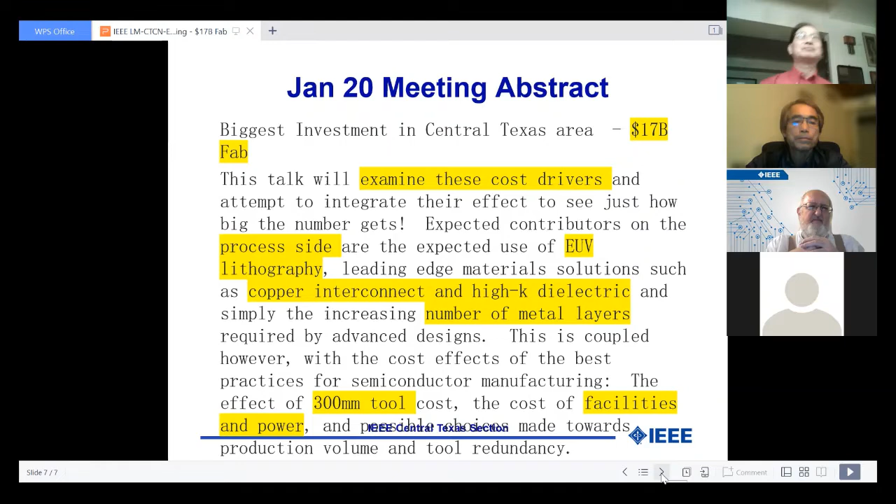I don't know. So I'm out of that business for a long time. I retired in 2001. I used to be a product engineer. So I know some of those terms, but I really don't understand the actual workings of those fab areas. So I'm really glad that Dr. Larson will talk about this. So Dr. Larson, the floor is yours.

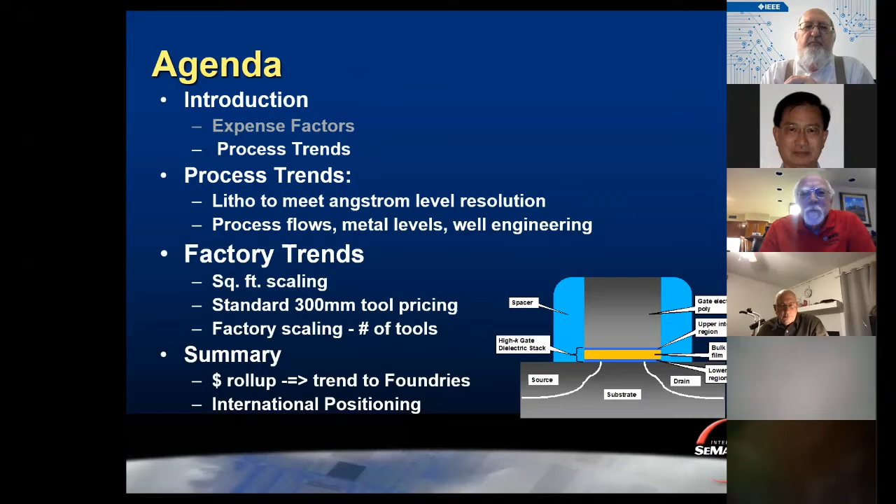Let me go on to what I have to talk about. What I'd like to start with is simply some of the process trends over time. I will then follow, I noticed I used process trends again, but this is much more towards equipment rather than the global device thing. And then we'll move on to the factories that follow that. I use this in my classes, and it's just too concise to not include.

And this is scaling. Why do we scale? Well, it's actually pretty simple. If you take up here and say that I'm going to scale the channel length by a factor S. So if S increases, the channel length goes down.

You then, in pure scaling, would also scale the channel width. So all the dimensions shrink at the same time. To do that, gate oxide should also shrink, and the substrate doping, to keep pace, needs to go by S squared. Notice that's a multiplication. That's actually one of the issues with shrinking devices: the substrate doping needs to go up pretty much past where it's really capable.

But if you do that, the drain current goes up by that factor of S. So you shrink the device smaller, the drain current goes up by that same factor. And this is simply using the transistor drive equation. If you look at the input capacitance, that also shrinks by the factor S, which means then that the maximum switching frequency, which is proportional to the drain current divided by the capacitance, actually goes up by S squared. So this is where you get that gigantic increase in speed via size shrinking.

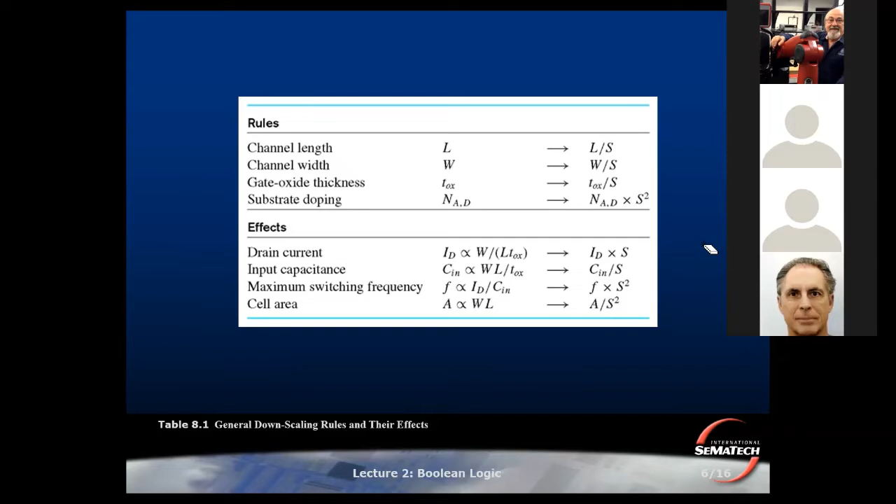Now, at the same time, the cell area that you would put the transistor in, since that was part of the shrink, goes down by S squared. So you get more devices operating faster with more power, all by that one simple thing. Sounds like you want it. Got to have that sort of thing. And of course, you all know from history that is what we've done.

So I saw you had talks about beyond Moore's law coming. Great. I'll just say, from one of the champions of Moore's law over the decades, we're still following it. This is actually a really old slide, at least 10 years old. And the basic scaling of devices has extended and has slowed a little bit. We're talking about 5 nanometer in 15.

And let me change you guys so I can see.

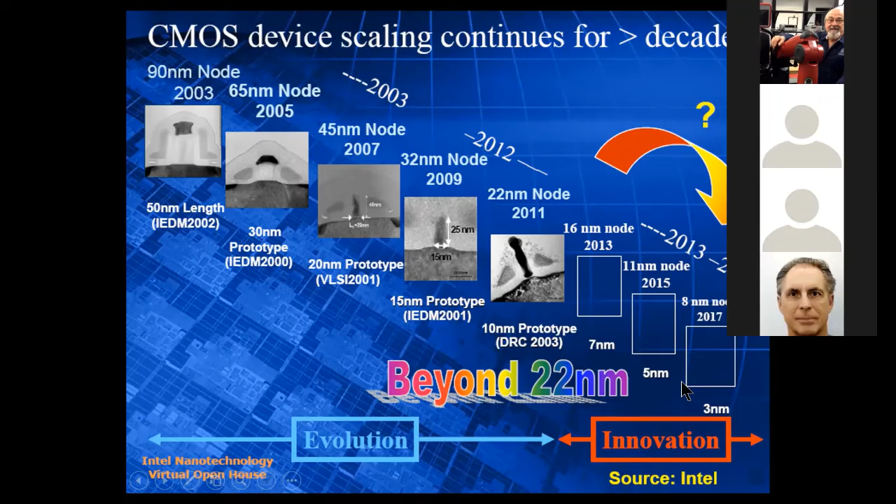Yeah, we thought we'd get to 3 nanometer just past 2017. So we're only a little behind it. That's all working, but we don't really know how to get too much farther. At the same time, where I poke at the skeptics out there is that for my entire career, CMOS scaling has won. You get higher performance, you get lower cost per function, and there's some bright young engineer out there that finds a way to do it.

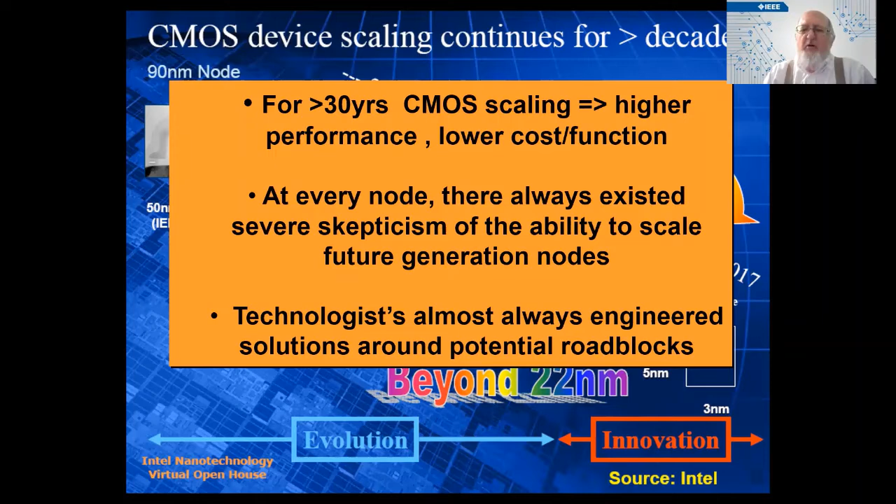So we're making devices that are 10 atoms across now as the gate length. It always causes you to pause, but we've always gone around those particular roadblocks. Now, where I played a lot is new materials and architectures. In building devices, we went from a really commonplace planar silicon device, and we moved on towards improved electrostatics in the Tri-Gate FET.

Since we're talking Samsung, I think it's really appropriate to note that this is a hardcore structure of the most advanced devices that they do, and relatively workable to build into designs. About the only thing I know of that's particularly troublesome is that when you have a FET, your gate width is set. This size right here, the gate, is 1 block. So the only way you get more drive current is lining up a bunch of FETs. But these things are so small and so powerful that it works.

Moving forward, gate all around is really interesting possible stuff. Perhaps the talk coming will go into that. And there were even demonstrations back about 2010 or so of carbon nanotubes as gate structure. So I'm mostly pointing and saying there are ways to evolve devices and go with it.

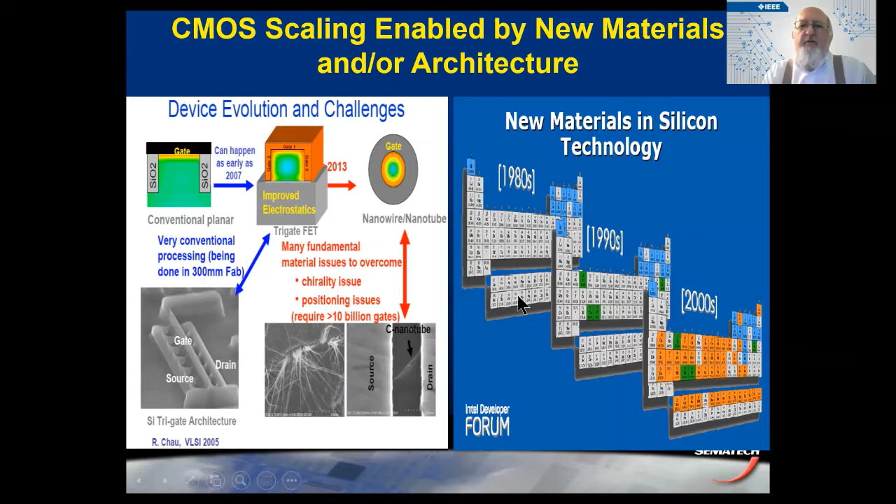Okay. So looking at the scaling that's gone on, and again, this is an old chart, those new materials and structures have extended and fit very well for us with the construction of super thin gate length. In fact, I saw a nice picture in the lecture I use for my semiconductor manufacturing class that had an early view of a 3 nanometer gate that looks much cleaner and beautiful. At the same time, high performance MOSFETs with interesting channel contributions, and of course moving to the FinFETs and the TriFET.

So all of these are good options and things that happen, but I'm putting it out there just to give you a vision of what's happened to the factory. So I think this is the last of those. Hey guys, look at all the stuff that's out there and coming. But this was our operating charter at the front end processes at Sematech.

And so the majority of the group worked on high K and metal gate. And that was the primary target that we were doing in the first decade of the 2000s. We found a very useful sort of thing. My development group was aimed more at implant and thermal technology, where we were doing whatever we could to get very, very shallow junctions here for the higher performance. We work with other people to do high mobility materials that would fit on that.

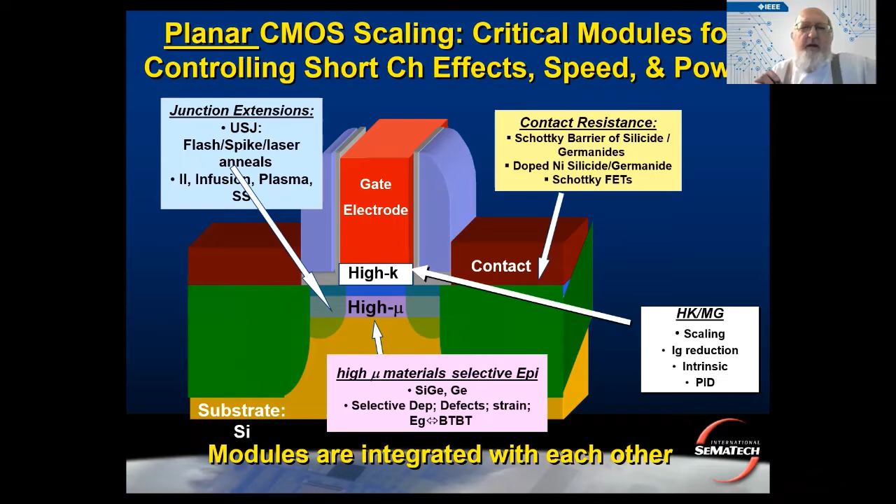All of those extend standard planar CMOS. And we also had a group that in the 2000s built FinFETs and went for that. So that's a good target of what's coming. Now, in addition, and this will lean towards the factory, although I'm not going to build it in strongly, is simply that all of the product lines out there are separated in the processes that they use and the design targets that they aim for into 3 generic areas. And we looked at that using the semiconductor drive current.

Of course, we have shrinking, but then we can also work on mobility and capacitance. And well, in Sematech, we could do nothing about the chosen gate voltage, but let that be. But what I'm talking about is the manufacturers would have a design area looking for high performance. High performance maximizes the current. Who cares what everything else is? Things that we developed for that was increasing the capacitance by having high K and metal gate and lowering the VT with having low band edge work function metal electrodes that go with it. And of course, enabling gate scaling.

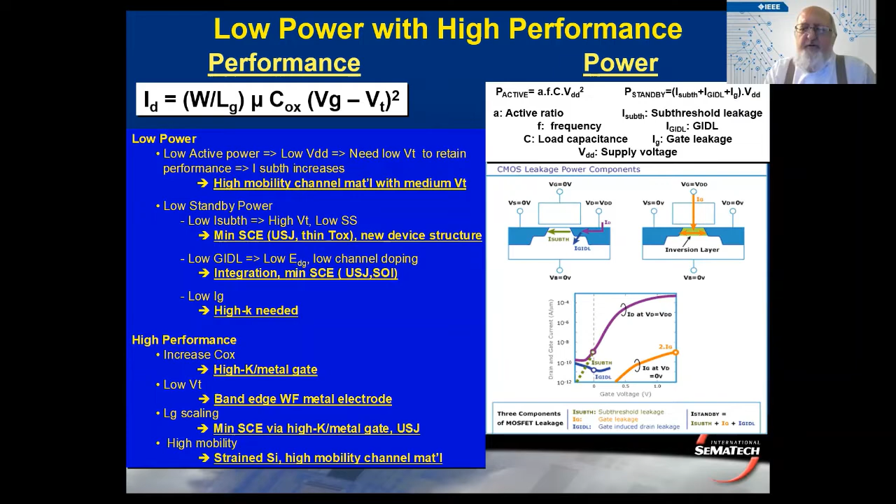And of course, I can't go very far since we are talking about Samsung and all of that without noting that FinFET technology has hit, grabbed, and worked. And in particular for memory devices, this excellent design. Why FinFETs work is that you have a gate around at least 3 sides of the channel. This would be your channel along here.

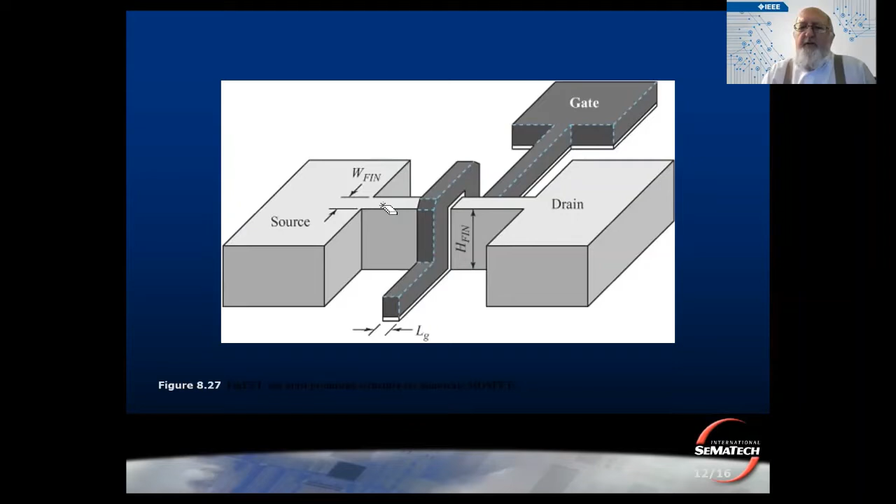And what happens is that the efficiency of depleting the channel, when you have the field going across 3 sides of it, is markedly more efficient than when you're simply putting a potential over the top of the thing. And so these transistors turn on and turn off markedly more efficiently and basically give you a much cleaner drive than you would have in other areas.

So this is an overview of what has been in terms of processing, setting the world that we live in for what are we actually going to be trying to build with that $17 billion factory? Now I want to look at more the equipment process trends and also the process flows that come into it. This area is a big driver of the cost of the factory. So first of all, and of course it was the first thing that was mentioned to me, is the EUV lithography.

And what I'm doing is using data that came out of Semiconductor Engineering in a talk there. I actually found Korean references that went to it. I did not see the specific model number, but most likely Samsung will be using the ASML NXE 3400 family devices. And here's your kicker right here. There we go. 13.5 nanometer wavelength.

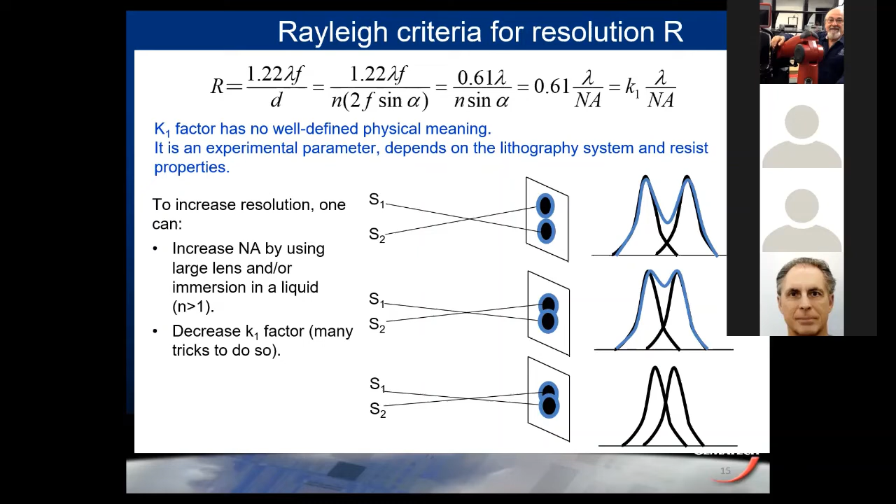And this will show you how old my slides are. Decreasing the wavelength, it's not easy because the industry still insists on 193. We were stuck there for a long time. And interestingly, the steps beyond that were tough until you got there. Now, just to let you know what we're talking about. Back when we were actively working with mercury type of wavelengths, picking different mercury lines, which, by the way, is most of the older lithography.

Come on, where's my thing? There it is. Yeah, there we go.

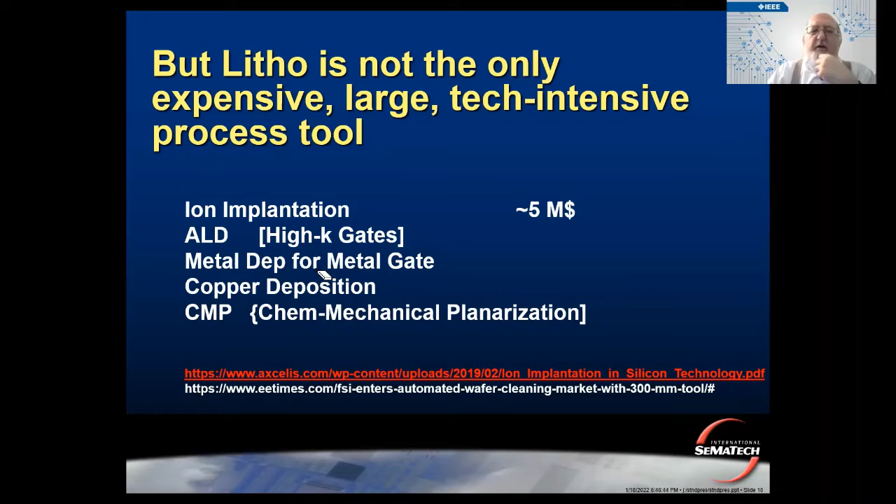Okay, well, going into those, of course, my big deal is ion implant. When I joined, we were putting an implant into the process or developing one. But after VT and then subcollector, it just exploded in terms of what you can do. The process development folks, working with good simulations, have added implantation after implantation for things that are needed.

So just moving through, of course, we have an LDD implant, which is really shallow. 500 angstroms deep was our target, and middling density to high in the contact area. But channel engineering was a big technology that people were going to. And you would have retrograde channel up close to seal the channel in. You'd have punch through and pocket implants to make sure the leakage currents were minimal.

Then we would have retrograde wells to tune the fields and the amount of leakage that you might get on both that would seal in these. By the time you get to where we're headed, there are 9 to 10 different implants. No big deal. Implanters are good for doing lots of stuff. But as I go into the processes themselves, that means it gets used, and you may need a separate implanter for each one of them. You hear the cost rolling.

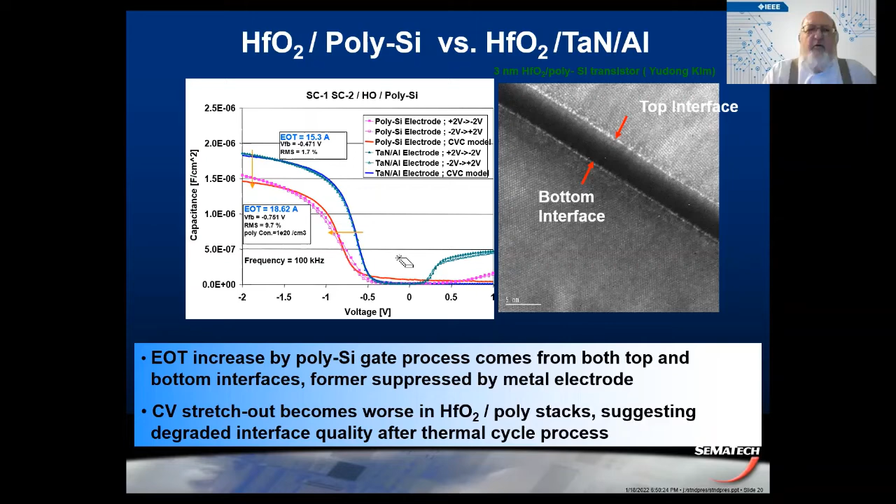So with high K and metal gate, you can pass that 20 angstrom limit for regular, I shouldn't say regular because that's silicon oxide type of oxides, really high quality, but the CV just stretched for that. So you need high K, you need metal gate. Okay, no big deal. We've learned how to do that. High K, of course, we have to learn how to deposit hafnium oxides, different kinds, depending on where you are.

And metal gate is something that people don't talk about a whole lot, but it's very cool in that, of course, it lets you implement your technologies, but there's a real issue with depletion of polysilicon gate. Very low resistance, no boron penetration, and compatibility with high K. So you want it that way. Issues with it: we were so spoiled using silicon because the work functions would always match or be close. Well, once you put different metals in, the work functions are all over the place.

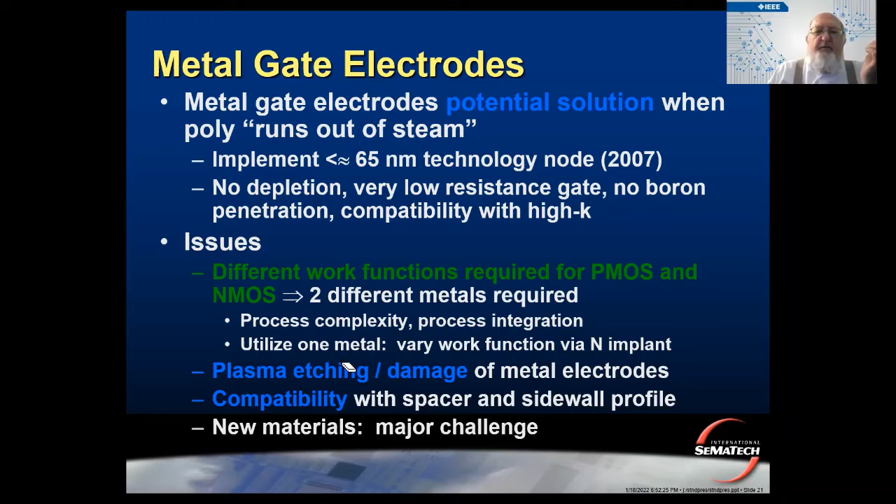And so basically you end up needing two different metals, and all of the compatibility issues that go with other devices. So I've gone on for quite a while with respect to the processes. And by the way, that's because that's the stuff I know and can really get into.

The effect it has is that the process flows have been growing asymptotically. Well engineering that I showed you in the implants, high K materials, 2 metal gates. I haven't even talked about copper itself. And you've seen in many places people advertising that they're doing 6 to 10 metal layers. Each of those is additional process steps that have to be carried out and built in.

So what I see, and interestingly, this is over my career and probably a fair bit of yours: when I started work in the 70s, there were 10 to 15 process steps, which were on a 3x5 card taped to the top of the 3 or 4 inch wafer box. And that's what you did. As we moved along, somewhere about 1 micron CMOS, it was up to about 50 steps. So that'd have to be on a long sheet, like an 8x10 sheet of paper. And yes, that was before all the cleanliness stuff. So you'd have the paper sheet and people would sign and initial that we did it.

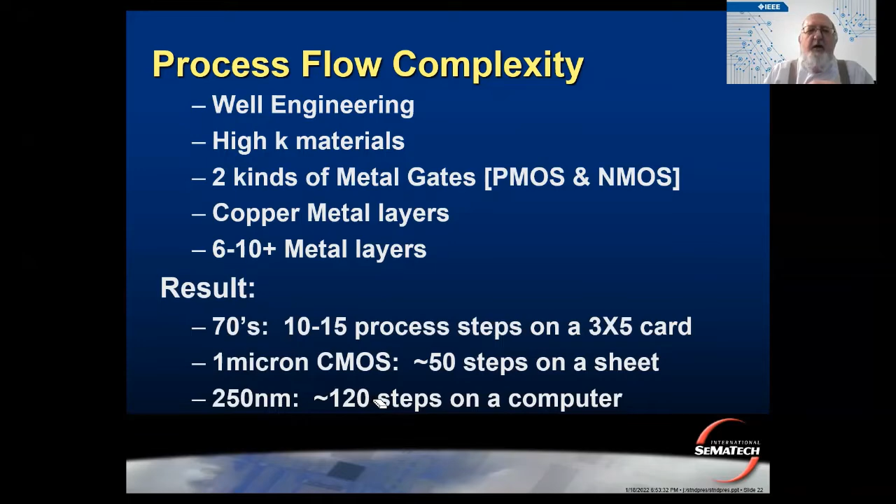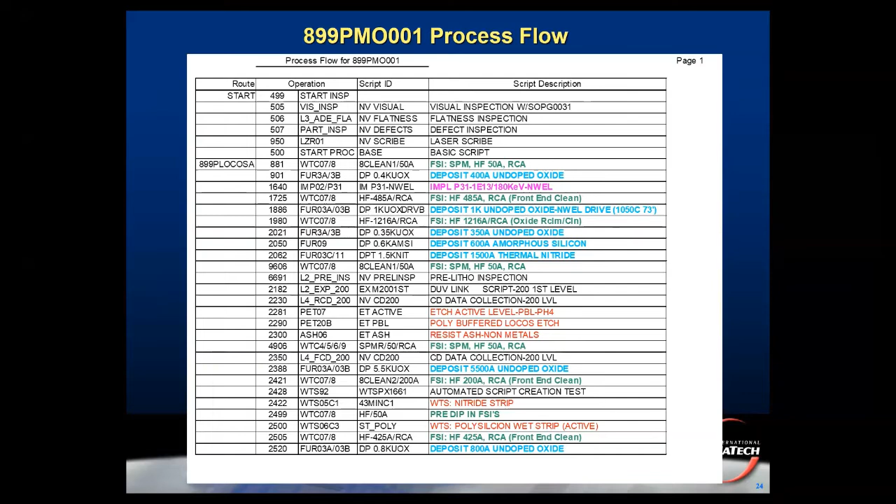When I was at Sematech, we were doing a 1/4 micron process, and that had 120 steps on a computer. And just to show you, I walked away with one of those. Now, I'm not going to lecture about this, although I do to my students. But I'll point to it right now and just say, every one of these steps is either a different process or a different tool that is used as you build your process.

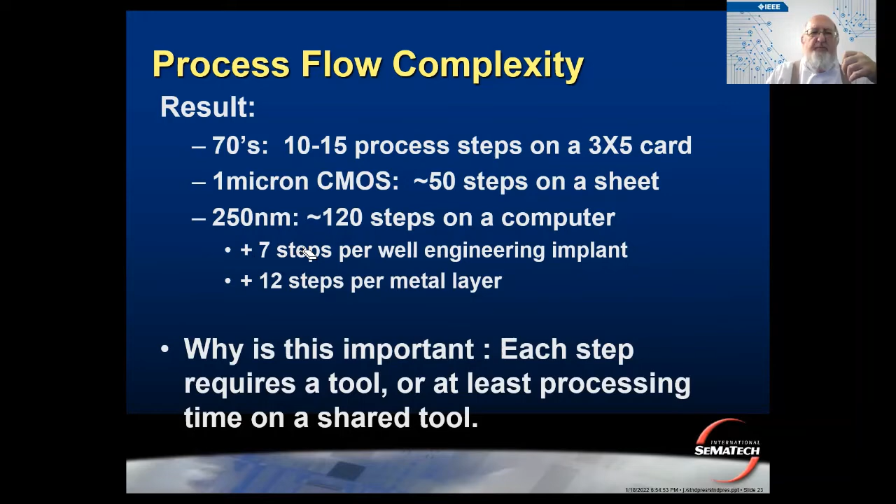So, well, that was my target. Going beyond, as a basic thing, you need about 7 steps for a litho loop for a well engineering layer. And you need about 12 steps for the litho loop that is a metal layer. So even though I don't have the processes of this kind, you can expect that they increased by at least those. The process itself has expanded markedly. So this is here because I'll actually use that a bit later, but not get into it.

I want to turn a little bit. Actually, I'll take a little breath and see if there's any hands up or microphones of people just itching. Any comments or questions? Okay, well, I'll go on then and hit you with the hard stuff. Share go.

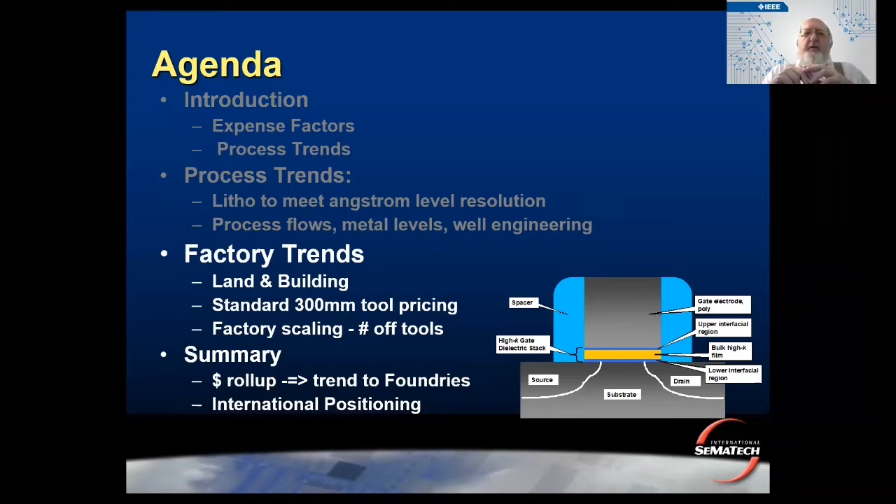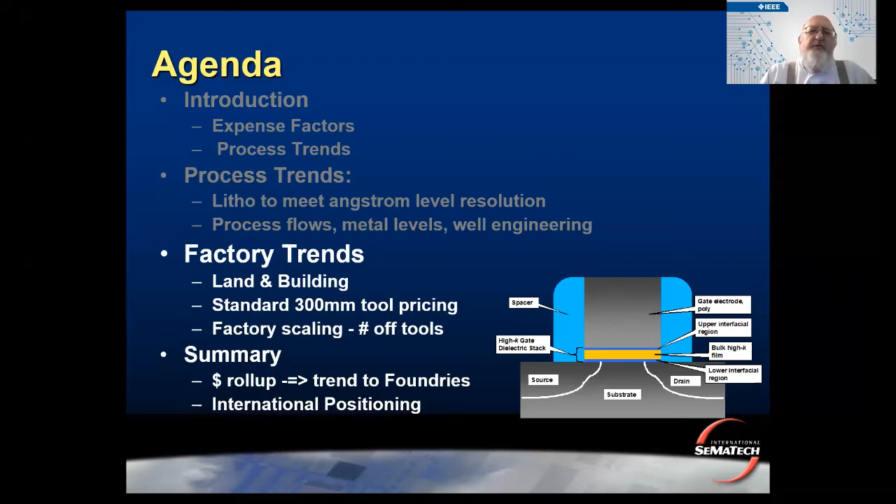Because now I want to talk about the factory trends itself. And this is where I started looking at what's been publicized about the factory. Because one of the first things that people mention to me is the land and the buildings that come to it. And so I want to refer to you and say, hey, what about this 17 billion thing? As I went into that and took a look, basically what I found in the American Statesman, and actually several other ones. By the way, I have references down here on what they are.

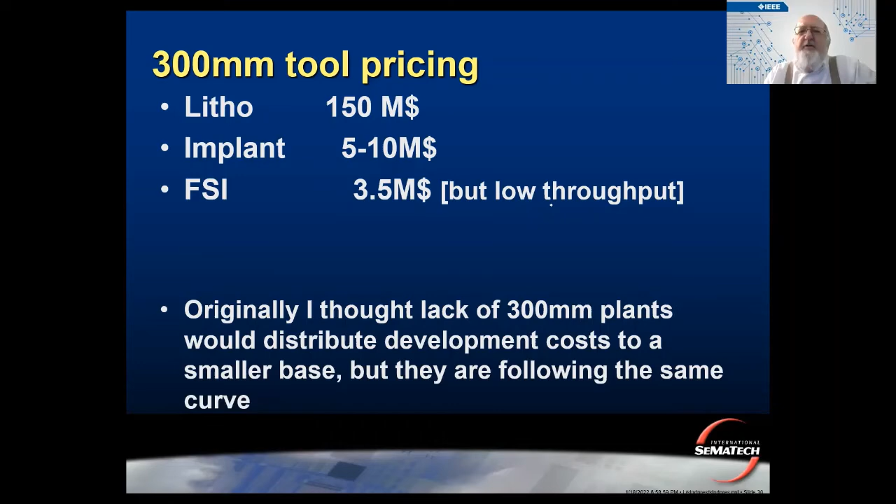So somewhere about here is where the light went on for me, at least with respect to this. Because I will admit to you that most of my work was in development fabs and first run type of stuff. So that picture I showed you of the Sematech fab is pretty much a minimum volume fab, sort of like one tool of each kind.

And as we work through it, sort of standard for that kind of fab, if you expect to be a successful semiconductor company, is that the tool is going to have to do about 20 wafers per hour at a minimum. And you can take a one-of-a-kind of that and do a first intro fab that does about 2,000 wafer starts a week. So that was my picture of a fab.

And so as I dealt with this industrial engineering, I was looking at this sort of area, in particular saying that one tool going down stops the whole line. And so there's good practice of cross-qualification and multiple tools per step and all sorts of stuff like that. This is where the light turns on, because that same

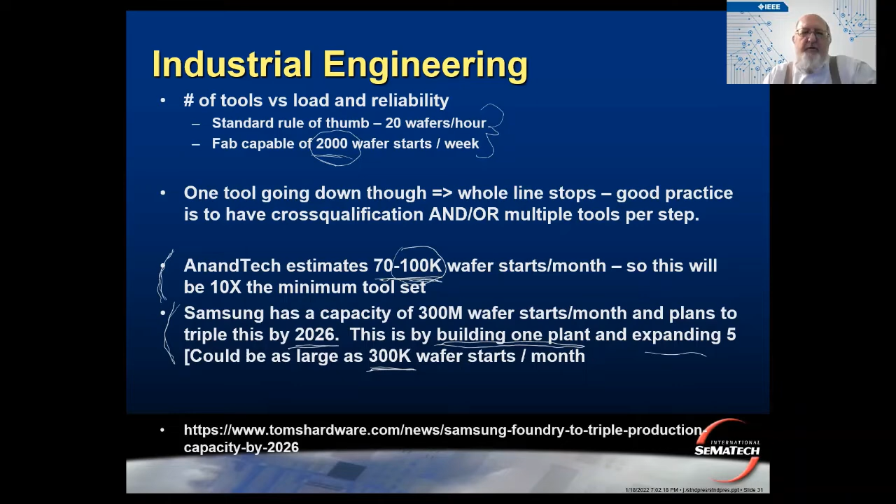So what I'm seeing from that, when I converted from 200 millimeter wafer starts to 300 millimeter wafer starts, I got that that single plant could be doing as high as 300K wafer starts. It's not just the tool price, it's the volume. In fact, I watched a YouTube video last week for my class on Intel's Fab 42, which is another big guy. That was where AnandTech did their 100K, and that's a monster factory. It literally is 10 times the size of what I showed you.

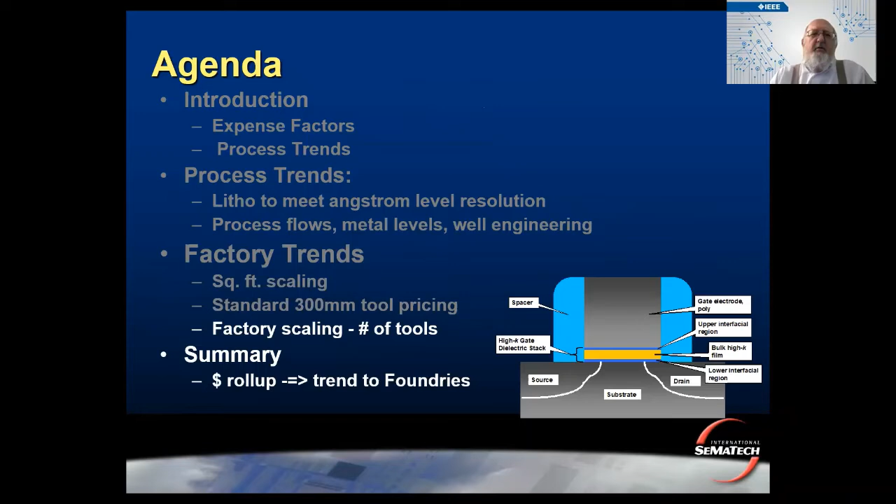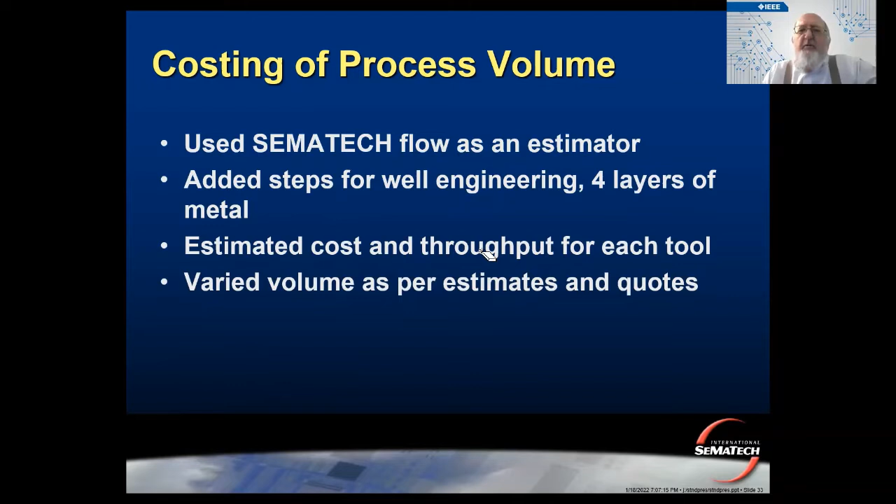And so I had that process flow. I figured, let's do a little work, just to see where it is. So I used the Sematech flow as an estimator. I added some more steps for well engineering. I put 4 layers of metal. Because it's the business I was in, I have a pretty good idea about cost and throughput for each tool. And then I varied the volume as per those estimates and quotes. And what did I find?

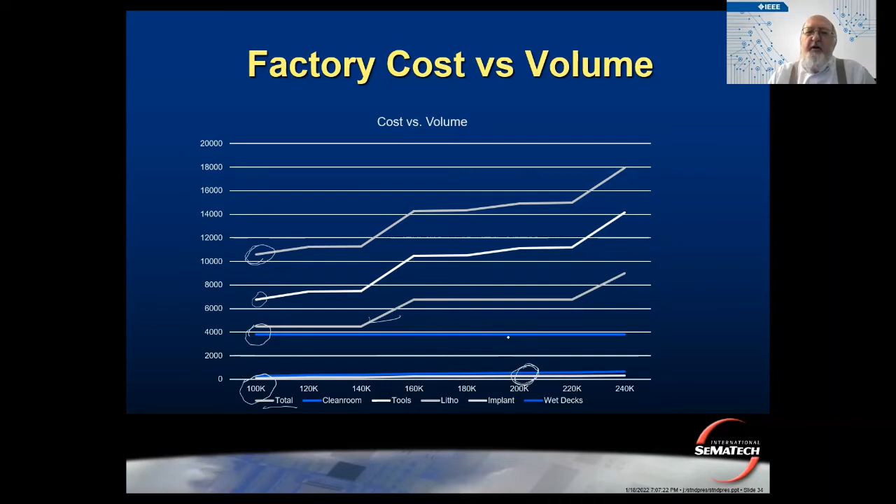Just to note, number of tools per volume. Well, in fact, I should go back and note, sadly, and this is probably why I never got a big salary, implant and wet decks were pretty much a trivial cost compared to the other stuff, even though they were big contributors. I also looked at number of tools per volume, and that was kind of interesting

because the litho ran from a low of about 30 of those $150 million behemoths up to almost 60. The implanters, which are big and expensive, went from 18 up to just short of 40. And I'd like you to note that because their processing capability changes, this curve jumps at different points. The litho is actually pretty good. And here, for the wet decks, you just flood the thing with those.

Wet decks are sort of interesting because they have a chemical process that is basically gonna take as long as it's gonna take. And so you just need more chambers. This is really conducive for that sort of thing, but it's a large one. Now, do not try to build silicon on this. This is an argument that it's clearly the process flow and the volume that drives the $17 billion.

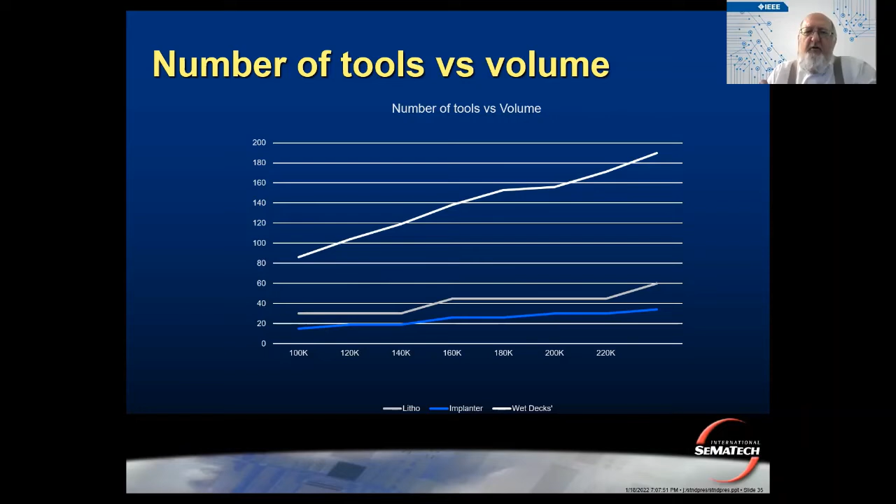And the ratio, as said by AnandTech, really fits pretty well. 5 billion for the clean room and a little bit for the buildings and the roads and all that sort of stuff, but it's really not large as things go. And then 10 to $12 billion for process equipment. So that's my answer. I see a number of things came up in the chat, but we can chat about it. Land, I say, is no.

300 millimeter wafers, I never really looked into very far, but basically when the process is flowing, each tool has a box in it, and that cost is small. Power and facilities, I'm interested in, just because that goes. Salaries and taxes are incremental costs that go with it. And the big is process equipment to the order of 12 billion roughly.

Well, excuse me. Process equipment and volume to the order of about 12 billion. And the clean room is about 5 billion as it goes. So that's my end. And hopefully it's a good discussion about where it sits. I'll take a look at the chat now and see where things are. You are, of course, perfectly okay to say things.